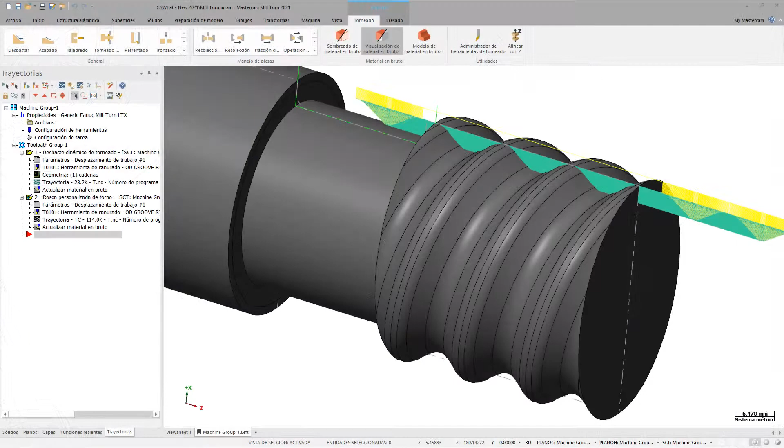Mastercam Mill-Turn now supports collet chucks and collets as individual component types. This greatly expands the range of machines that can be directly supported by Mill-Turn. Collets and collet chucks are fully supported by machine simulation.

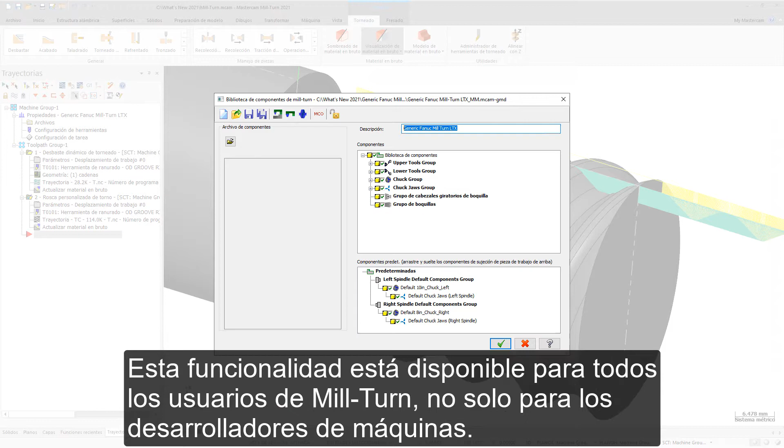They can be modeled either parametrically, or you can choose a solid model of the component. This functionality is available to all Mill-Turn users, not just machine developers. Use Mastercam's component library to create collets and collet chucks and organize them in libraries with your other chucks and

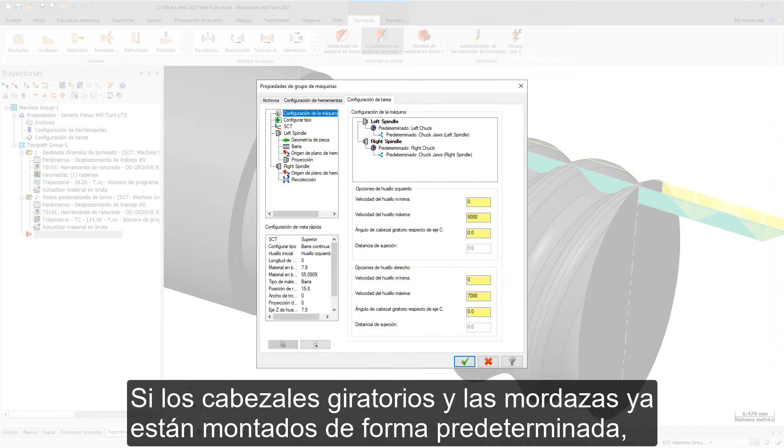chuck jaws. Then, once you load your machine in Mastercam, simply select the desired components as part of Mill-Turn's job setup. If chucks and jaws are already mounted by default, remove them before selecting a collet chuck and collet.

Mastercam 2021 expands the support for modeling chucks and chuck jaws. You now can define chucks and chuck jaws by selecting a solid model. Additionally, Mastercam 2020 introduced the ability to define a chuck with a chain profile. This functionality has been extended to include chuck jaws.

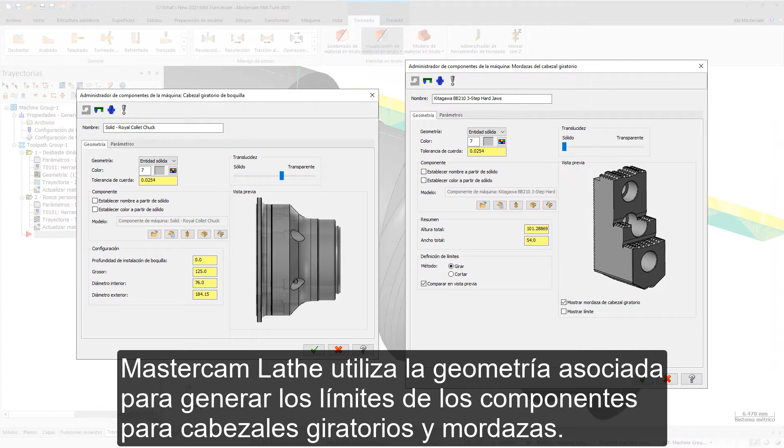This functionality is available to both Lathe and Mill-Turn users. Mastercam Lathe uses the associated geometry to generate the component boundaries for chucks and jaws. Mastercam Mill-Turn's machine simulation and collision detection functions fully support the new geometry options.

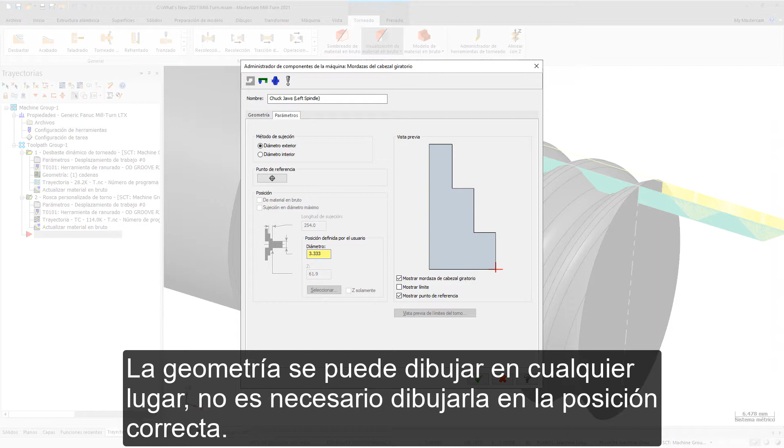For chuck jaws that are defined by chain geometry, you can position the reference position or clamping position anywhere along the chain. The geometry can be drawn anywhere, it does not need to be drawn in the proper position. In addition, Mastercam will automatically flip the profile as needed so that the jaws can be used on either spindle.

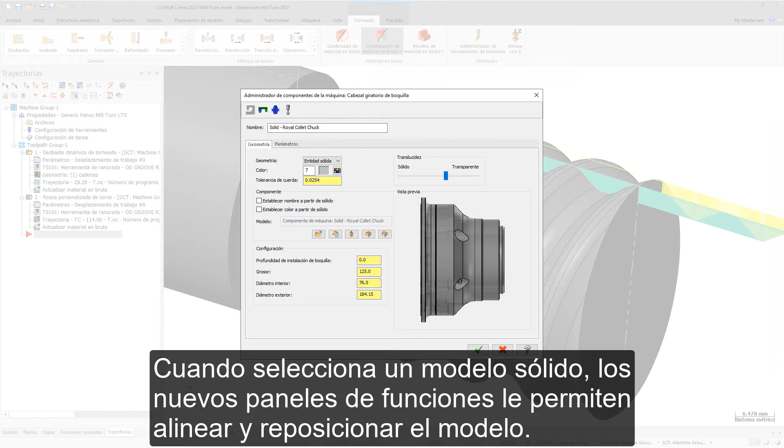The interface and workflow for working with chuck and jaw components have also been redesigned. These changes also apply to the new collet and collet chuck components. When you select a solid model, new function panels let you align and reposition the model. This means that the component model does not need to be drawn in a specific orientation or location.

Select Align Component on the Geometry tab. The new Align Collet Chuck function panel displays. You can make the necessary changes as part of the component definition workflow.

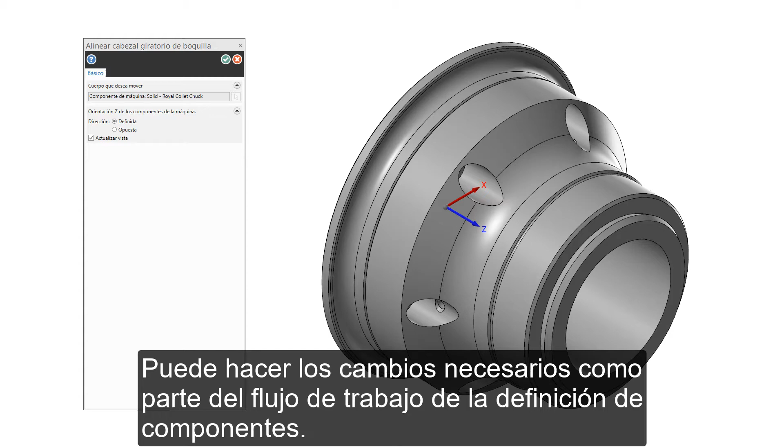You can select a solid model from an external file or a level in your part. Additional controls let you optimize or repair the model, or return to the Align function panel to make changes. These new buttons are on the Geometry tab.

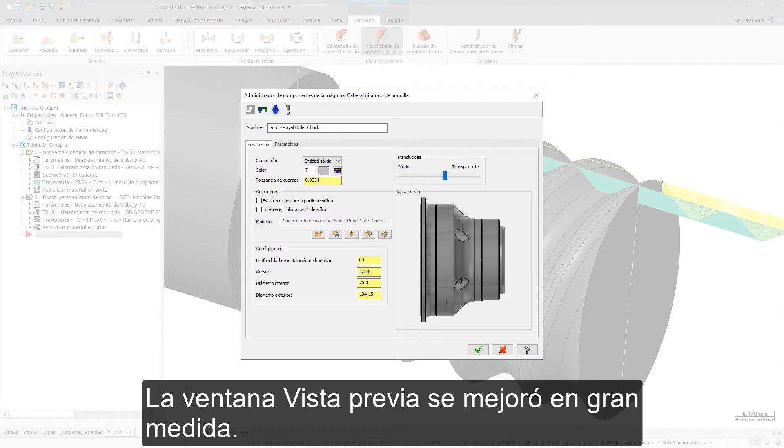The preview window has been significantly enhanced. Right-click in the window to rotate the component or view it from different angles. Use the translucency slider to see details on hidden faces of the component. The enhanced preview is also available for components that are defined parametrically or with chain geometry.

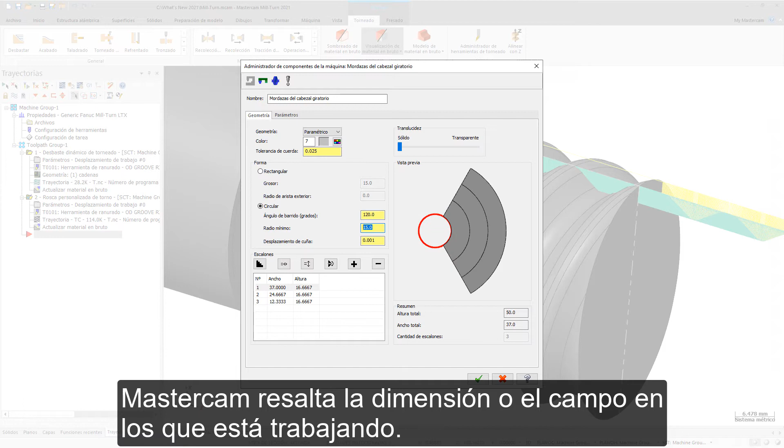Mastercam highlights the dimension or field that you are working on. The channel depth for chucks is previewed accurately. Additional options are available for specific components. For example, you can display the collet, its 2D boundary, or both.

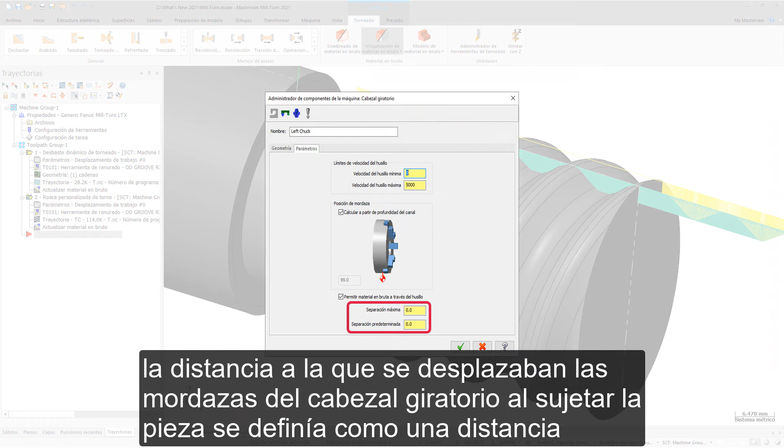In earlier versions of Mastercam, the distance that the chuck jaws moved when clamping the part was defined as a clearance distance for the chuck. This was misleading and confusing to many users. In Mastercam 2021, these settings have been more clearly labeled as clamping distance on the Parameters tab and incorporated into the general redesign of chuck and jaws components.

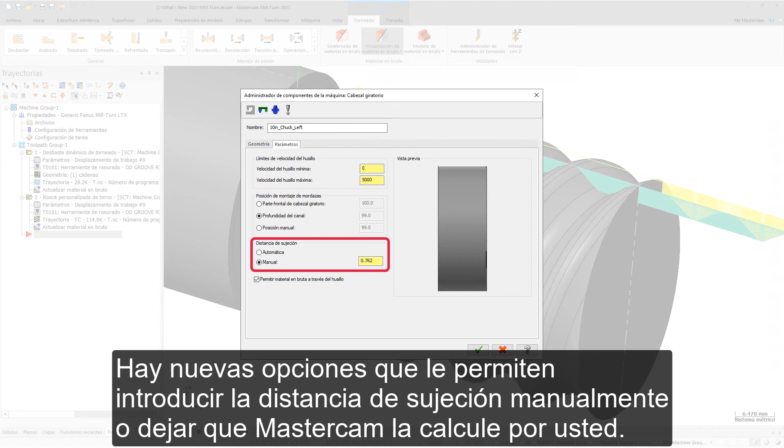New options let you enter the clamping distance manually or let Mastercam calculate it for you. Mastercam uses intelligent algorithms to calculate different values for jaws and collet components. For example, the range of motion for a collet is typically much smaller than for chuck jaws.

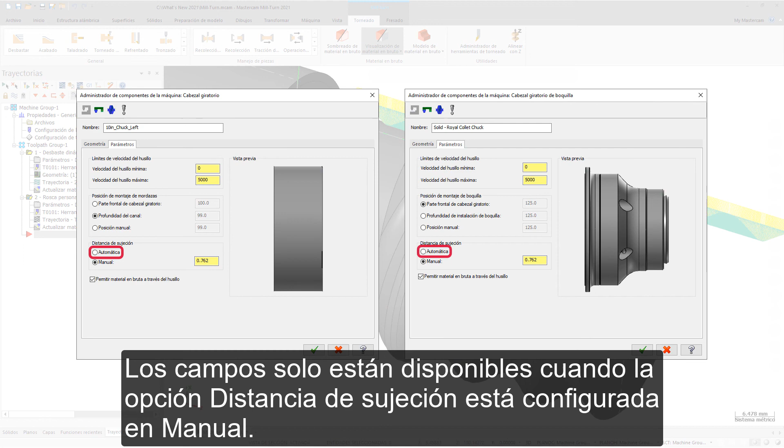The redesign carries through to the job setup where users can adjust the values as needed for each spindle. The fields are only available when the clamping distance has been set to manual.